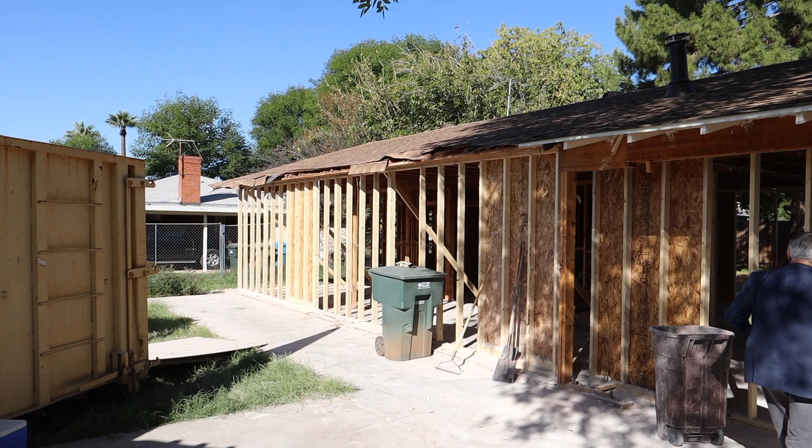Looking a little different now. Yeah. A little different. Wow. So much different to see this place all shored up. Just charging batteries, we're all right.

Nick, have you met Corey? Hey, Corey. Nick, nice to meet you. Nice to meet you. He's Nick. Nick is the responsible one for tearing down all these walls. Hey, somebody has to do it. Well, thank you. It was fun. It was interesting.

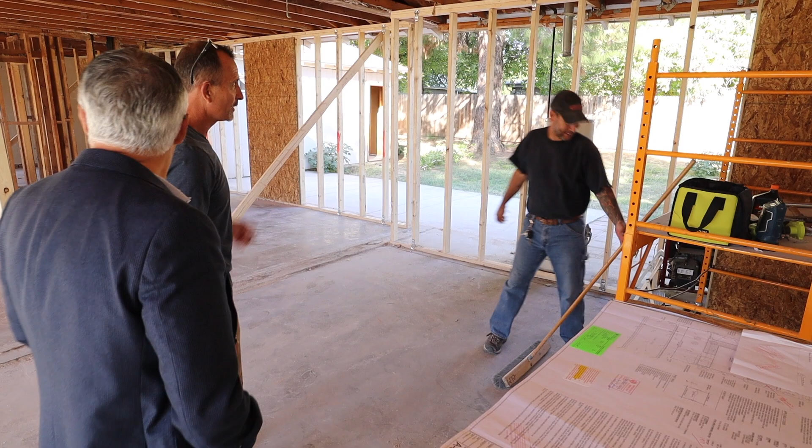We have to move that panel. So I gotta discharge that line, and SRP won't discharge that line unless we get all the bamboo away from that telephone pole back there.

Hey, Jim. I was thinking of over here. Remember, we were saying we're taking out the concrete, putting pavers. What we can also do, depending where the garage door is going to be, somewhere there or a little bit further. This concrete is not in bad shape, and what I'm thinking, if we saw cut the concrete and leave like a 6-inch gap in between and make it like a square pattern like we do in our other projects, we can actually leave it here and then put turf in between, and it creates this array of concrete and green turf, and that becomes your driveway.

And it's going to connect the grass area everywhere. It's not even going to look like a driveway, although you are going to be on a driveway. So think about maybe instead of getting rid of this and throwing it away, we can actually use it. This will be a natural break point. Then over here we take the 24 inches or 30, cut it, and then leave a 6-inch slice, and that's going to be artificial and so on. We can do it that way. It doesn't have to be in squares. It can be in big rectangular pieces and so on.

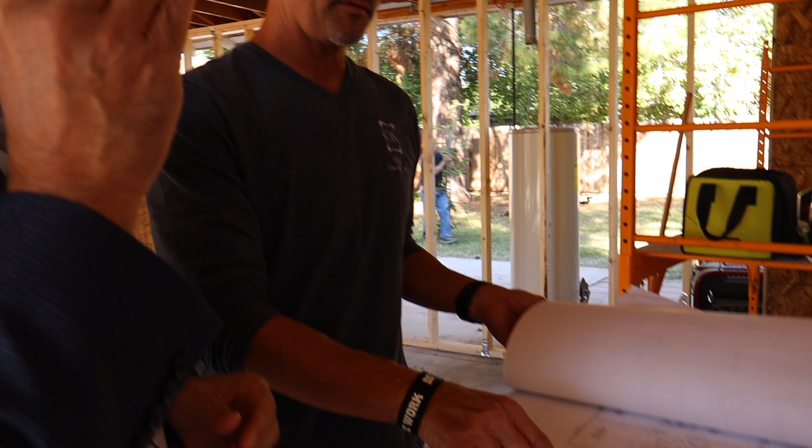That's the amount that we're going out front. Just want to see how much. Okay, 10 feet. So it's perfect. We have 10 feet with plenty of room for the garage door because it's only 8 feet high. So this will be a 9-foot ceiling right there. This is 8 foot, the bottom of the glulam. So this one here, you're gonna eventually rip it out because it's just on grade. There's no footings there.

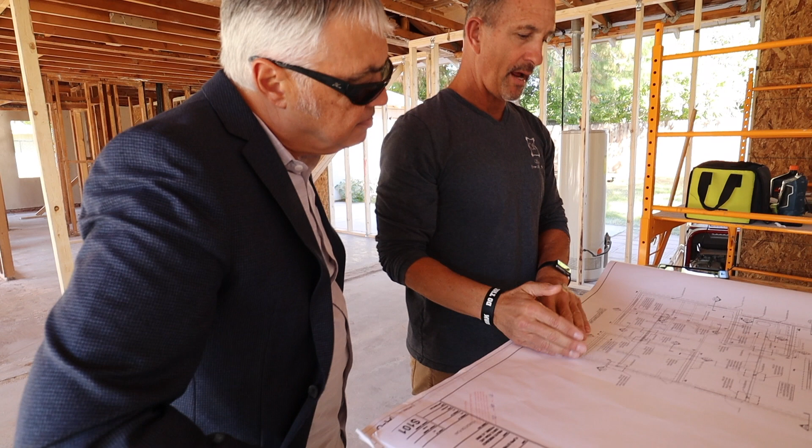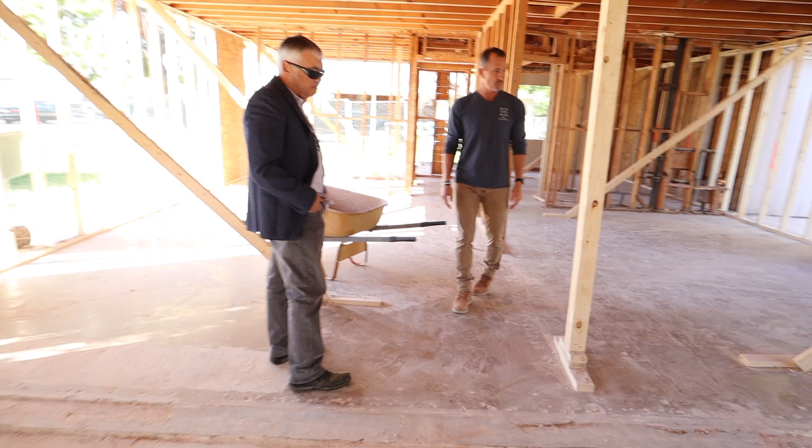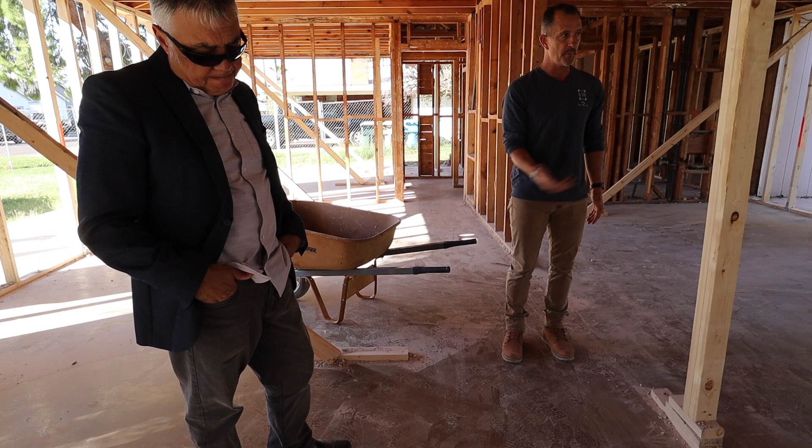Now question for you. This is all garage right here. This is the existing slab. Now I'm going to have a little lip here because this is coming over to approximately right here. You think tripping hazard? Do you think I should just pour a lightweight concrete in here, because the cost to rip all this out? No, I would not rip it out, but we need something to even out the difference in height. This is a tripping hazard.

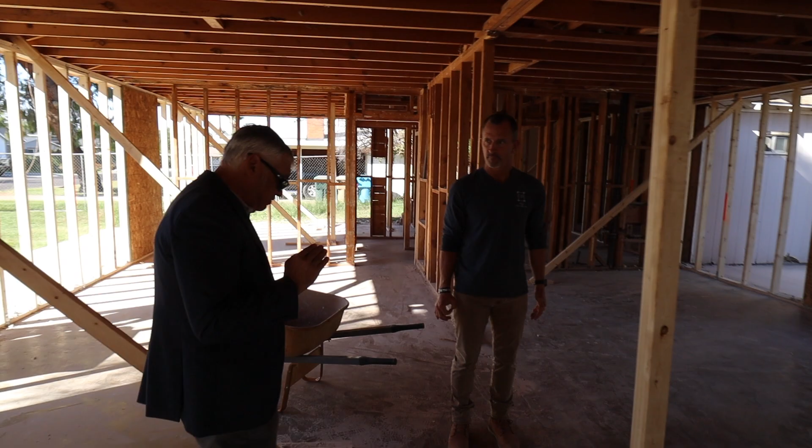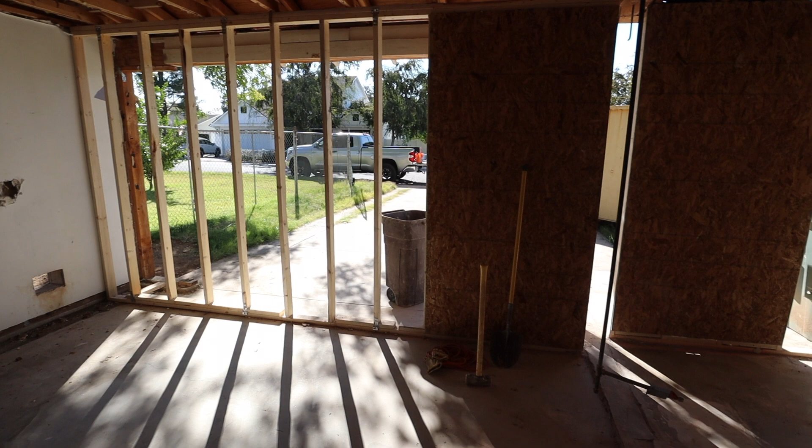But I don't know if there has to be material that's strong enough at a 1 inch thick instead of just a lightweight, because it's a garage. I agree with you. I'm thinking more like a self-leveling. Yeah, self-leveling concrete would probably make more sense. And Ardex has a lot of concrete topping compounds that you can use.

Really? Yeah. And the other thing that I would do, frankly, is if you have it in your budget to do an epoxy finish on the floor, a painted epoxy finish, it really makes it neat. I planned on it. I've already put that in my budget line item, epoxy garage floor. Perfect. Then it'll be great. Yeah, put the self-level in, get it all at one level, and then paint it. It'll be nice and clean and easy to maintain after.

Didn't mean to intervene, but you were talking floors. No, you're good. You're good.

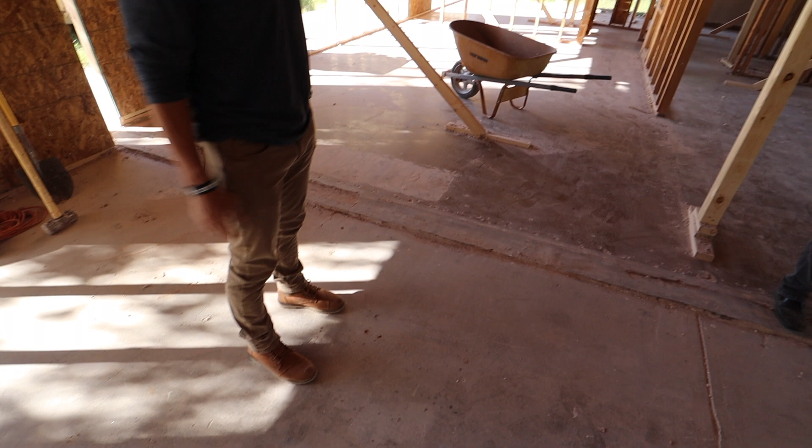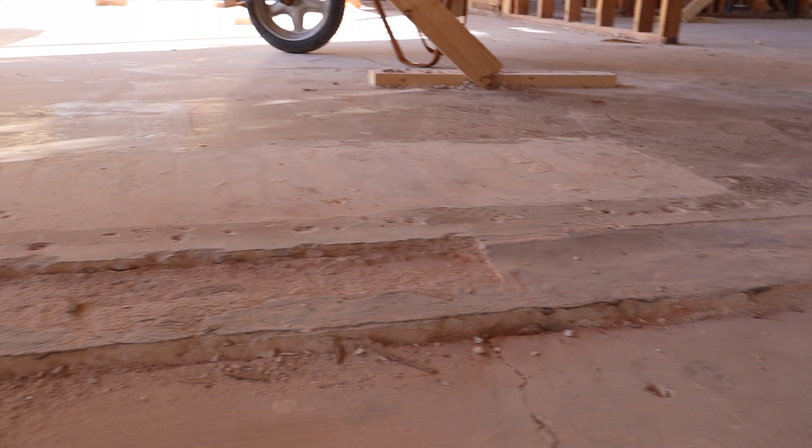And Corey, I may want to have you look into this of bringing in some Ardex and leveling this out, because it's too much for me to rip this out. Opening up the pores of this, a primer, and mixing the Ardex. And then leveling this off. And I can show you where I think it's going to come to, about right here in this area. This is all I need. The rest, then we just build a dam across there.

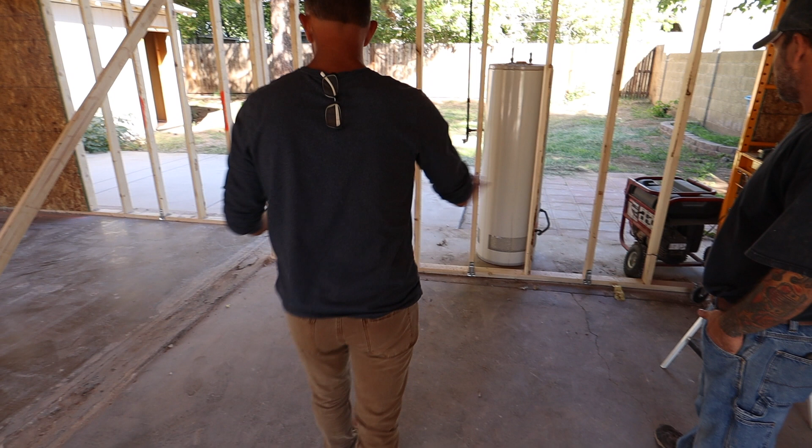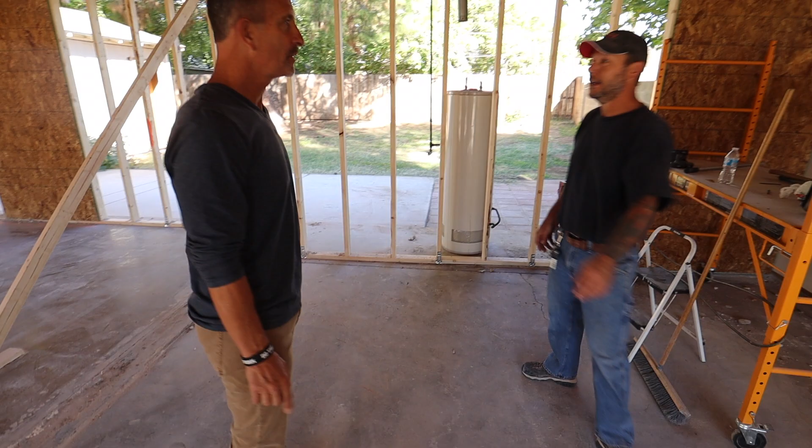And actually, we're gonna have to lift this up. You can see how this floats up. Right. We're gonna have to lift this up here so we can keep this. Yeah. I had to drain this whole water heater yesterday as it was sitting on its perch. Well, the water never hit that corner drain, but it just took this lower valley of the garage, so yeah. Really? I would think just to take the whole thing up. Bring the whole thing up, because behind the garage, this is all kitchen now and great room. Yeah.

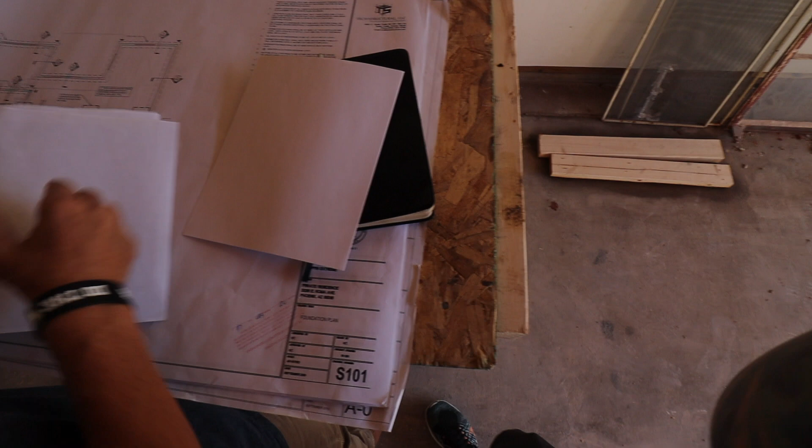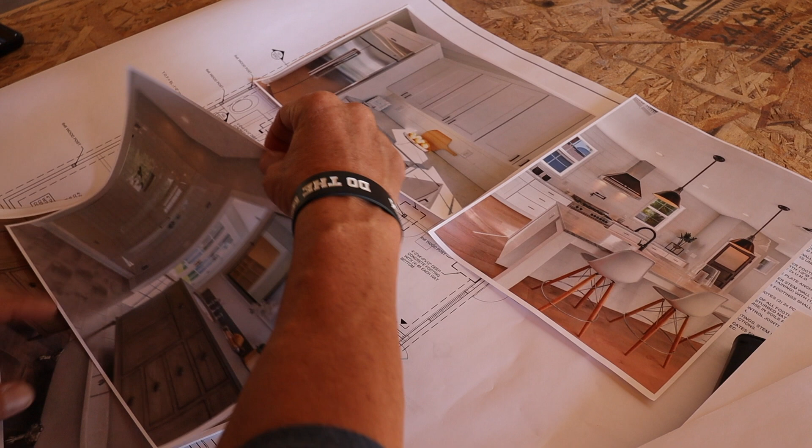So Jim, you said you wanted to talk to me about the kitchen ideas that you have. This is my vision, and I want to know what you think. Okay. White cabinets, just very light and bright. Yeah. It's pretty simple. Yeah, this is not what I would do, furniture like that. But kitchen-wise, I think that's good.

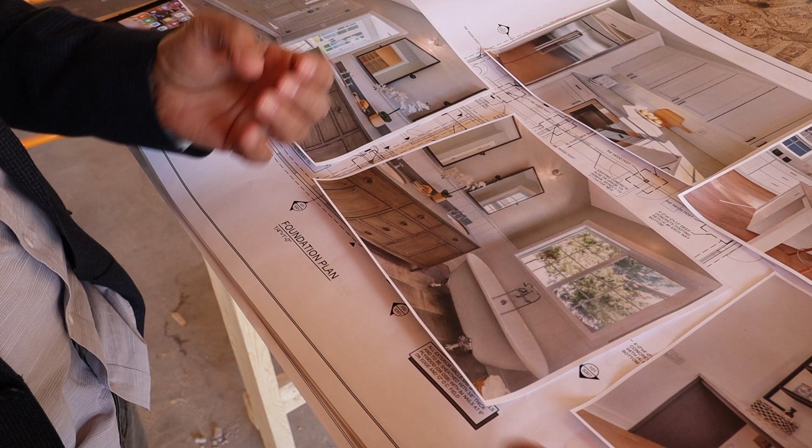This here, I would probably try to make them hung from the wall if you can, and have maybe a foot of space underneath, so it's a little more contemporary. If you want to do that, but again, in this type of style, and not going into this. Got it. Not get into the wood, but more of the shaker style white cabinet. Yeah.

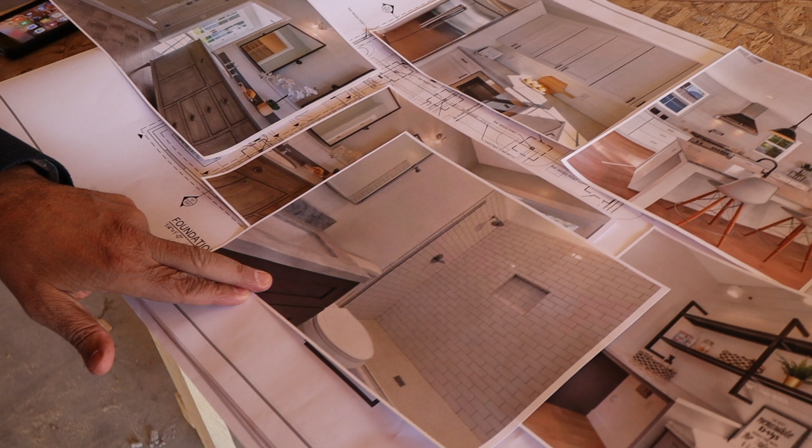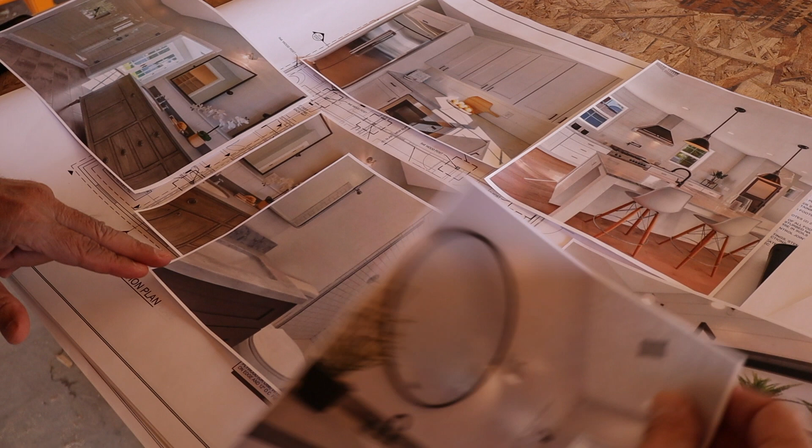Yeah. Subway tile in the shower. Yeah, it's fine. Maybe a different color of the shaker style. See, this is the shaker style. Again, it's a little more contemporary looking than just going to something like that, and I think that would be more neutral. So, see, that works. That's good. Yeah, that's kind of where I wanted to go with a lot of this stuff.

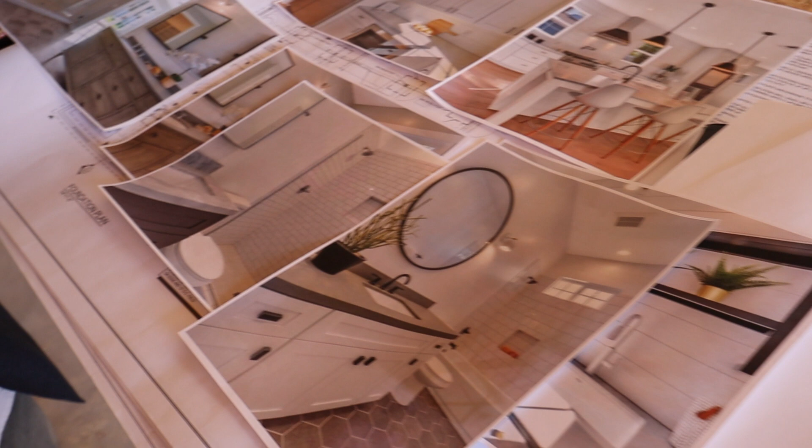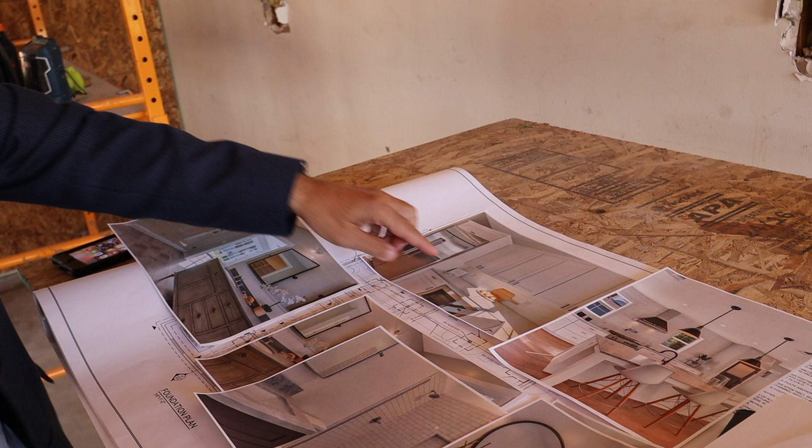Yes, and I also like stainless. So I like splashbacks that are easy to maintain. Like the stainless is pretty easy; doesn't have too many seams, and the same material as the countertop. That's good too. Especially, you know, this artificial stone that they have nowadays. It's very durable.